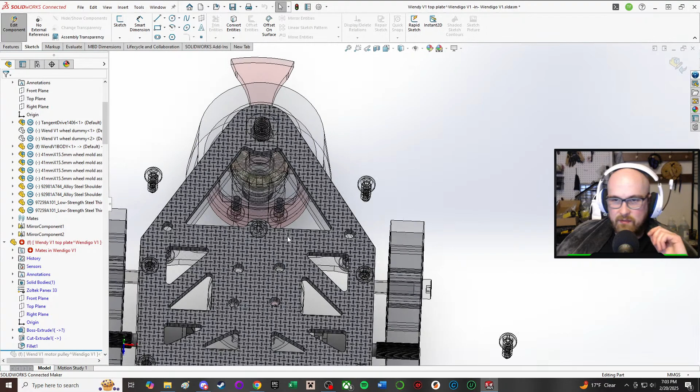But yeah, we're working. So since you didn't hear me, and for the VOD they're not going to hear me, I'll have to cut out the first part. But I was talking about how I want to make this part and this part one part, because these are already going to be 3D printed TPU, and since they're not one part, this ends up being a little more disjointed than I want it to be.

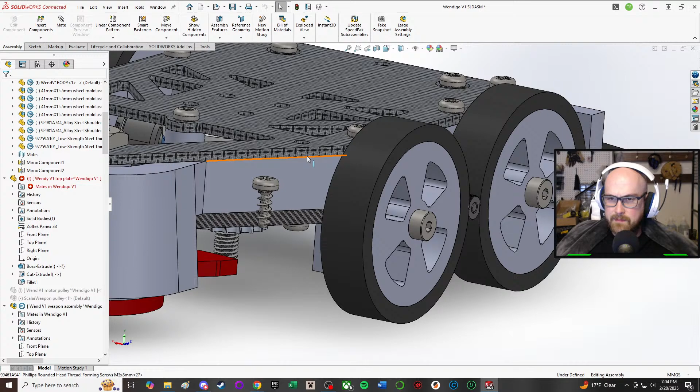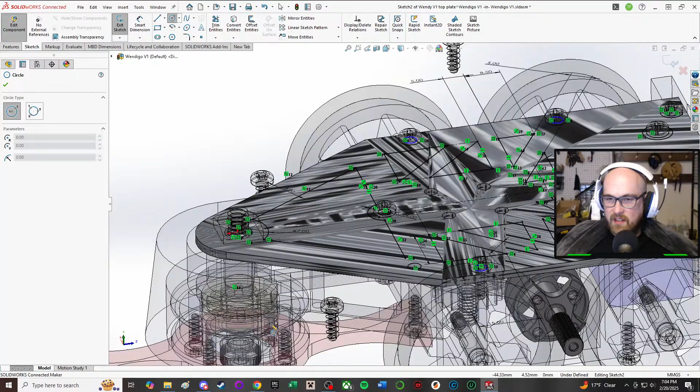Okay. So what's funny is I got rid of the whole thing, like I kind of knew. Hmm.

Don't want to sneeze into the microphone. Oh, okay. Couple weeks.

Are you, do you have your own robot? Are you also into the sport? Because I know I've gotten a couple people that haven't created a robot yet, sometimes in my chat.

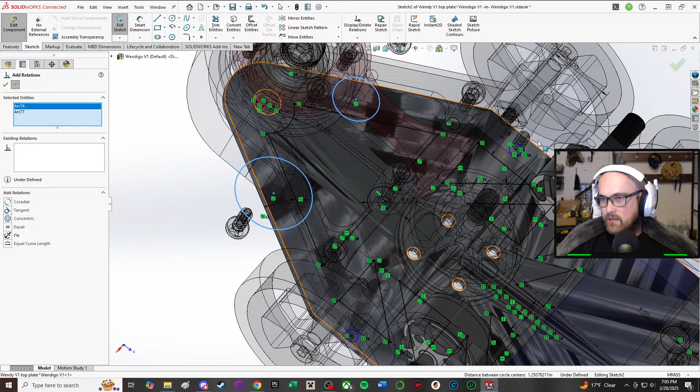Oh, for some reason it was making me select every cut region. It's weird because it normally doesn't make me do that.

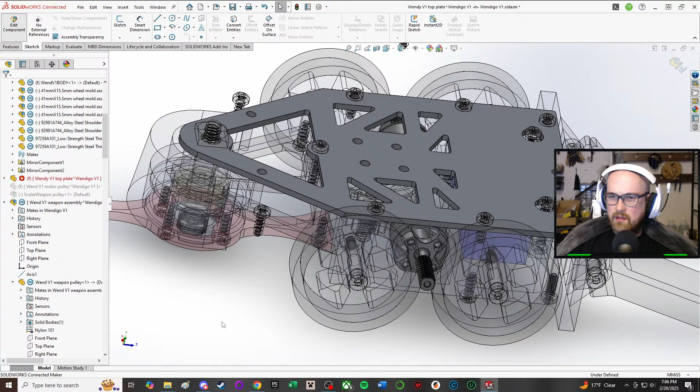I think I might start out, I think this for Wendigo, I think the first event I'm gonna run it as a plastic ant, just because I keep having second thoughts.

I keep having ideas like this for a robot, and then I end up thinking of other ideas. I'm like, oh, maybe I want to do that more, because I feel like right now I'm kind of looking for a robot that's going to be my main robot. All of last year, my main robot was Hodag, or not Hodag, Bigfoot.

And Bigfoot is what I think a little bit. I want something that actually has a weapon. Like I learned a lot with Bigfoot, but I want something other than a lifter, or at least has more going on than a lifter.

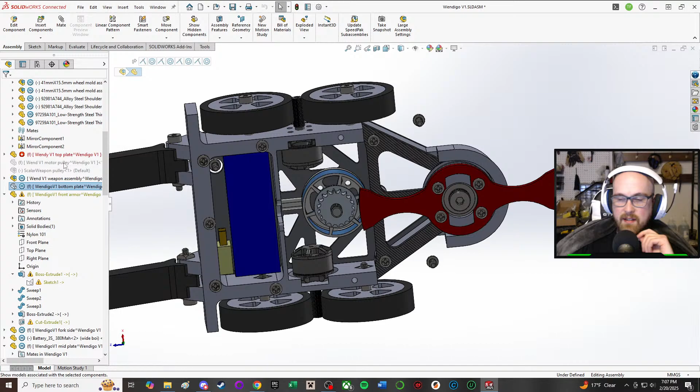Because I'd like to be able to deal some damage. Actually.

I'm adding a fillet here because there's not really much reason not to have a fillet there. There's nothing in the way.

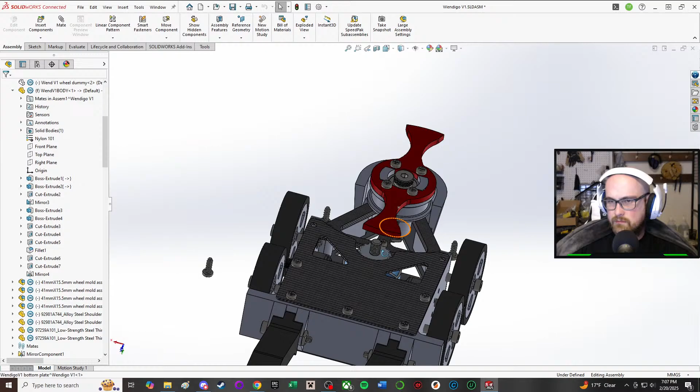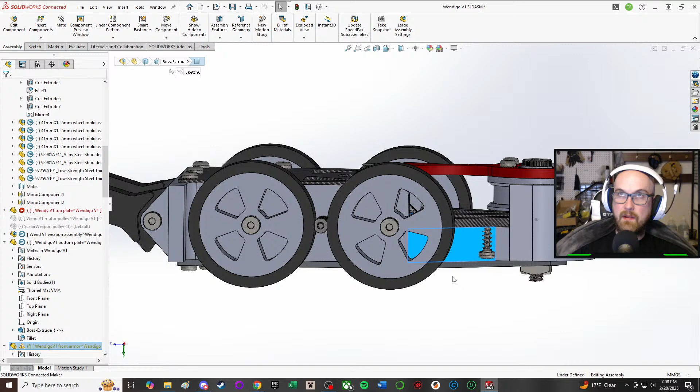Okay, I'm trying to think of the best way to add this part to this part, because I know that... you know what, I think I'm sorry. I'm thinking there's a couple of ways I could do it. It's not maybe a subassembly, because I've had to do this before. It's generally a very annoying process to combine two bodies. I had to do this with Bigfoot, and it was a nightmare.

Nope, I'm just trying to remember how to even insert a body, because occasionally I've done this. There's so many things I've done in SolidWorks, but I often forget about them. Actually, I know what I want to do.

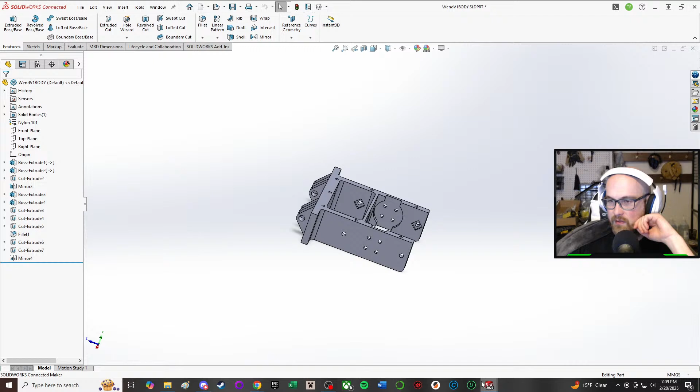Oh, I think the problem is... oh, I don't want to go to the STLs. Because I think the problem is I saved it. I didn't save it as a separate part, so it can't pull it.

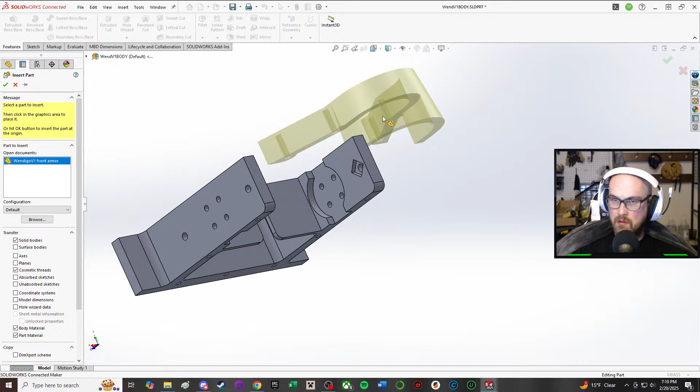Which usually isn't an issue, except for when I want to do stuff like this, or more specifically, if I want to use it. The thing is, I'm trying to remember how to actually move this around. Convert to mesh body, edit features.

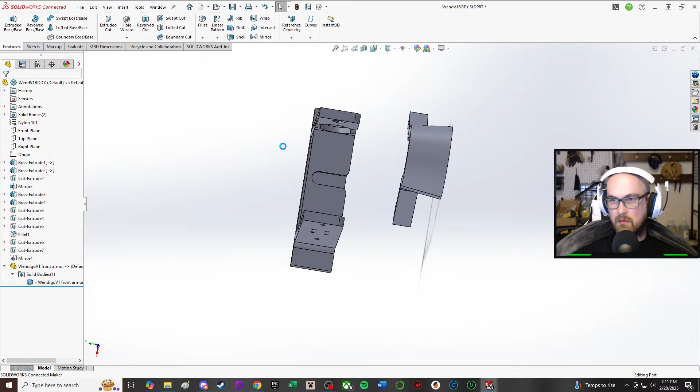This is the problem I had last time, it just sort of doesn't... it doesn't give you a good way to... fine. Almost the right spot.

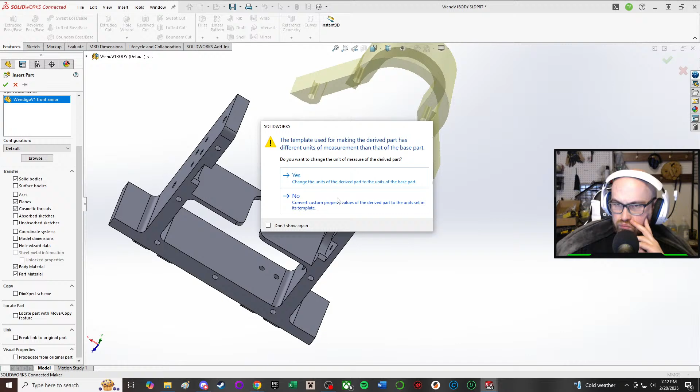As planes. Flip normal. I'm gonna have to do some Googling real quick, sorry.

Multiple configuration. Transfer. Just a 3D sketch on a plane. Current. This feels silly.

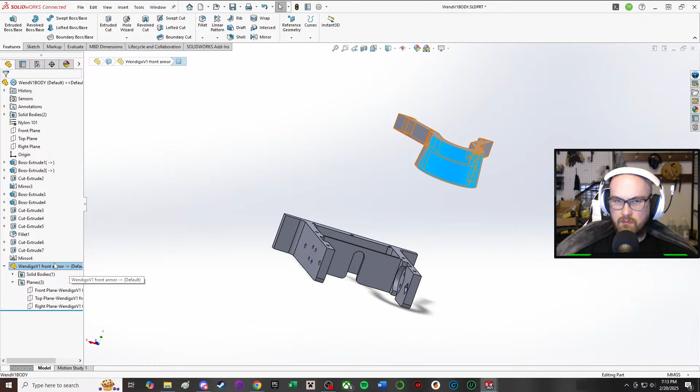Say locate part with Move/Copy feature. Okay, so I needed to check that one setting. It's kind of weird that that isn't by default.

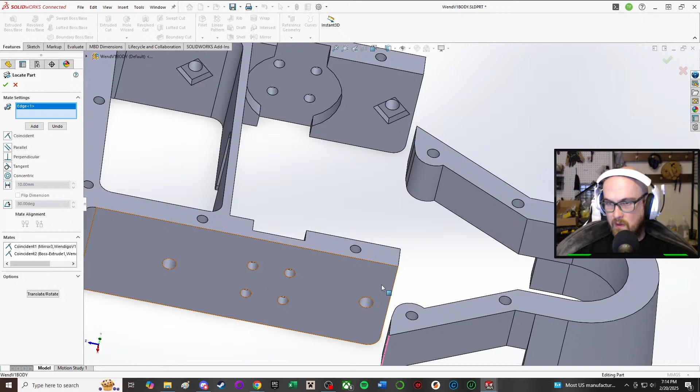Okay. Oh, there we go. Wait.

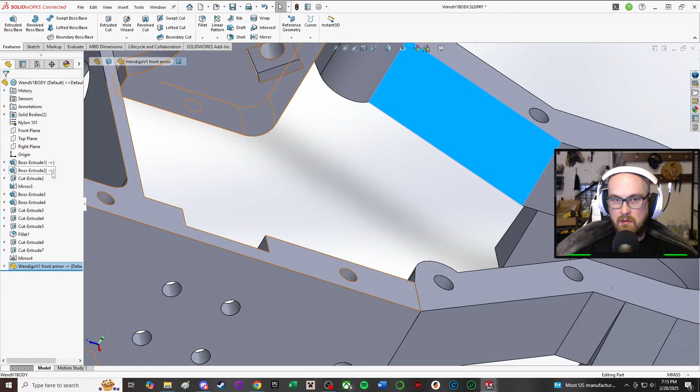Are these merged bodies or are they separate bodies? It's hard to tell actually. I didn't actually check if there was a merged bodies. Hopefully, if I try to, this should also conveniently still be pretty.

This won't make it any less 3D printable because it was meant to be 3D printed at the same orientation. So.

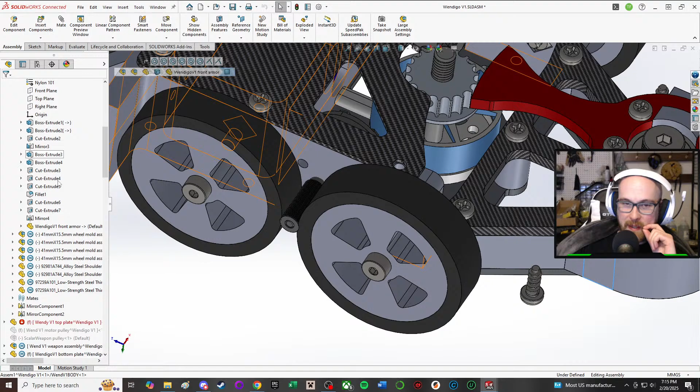Oh, just the body. Fortunately, now there's gonna be two of them, but I need to hide the other part if I can find it.

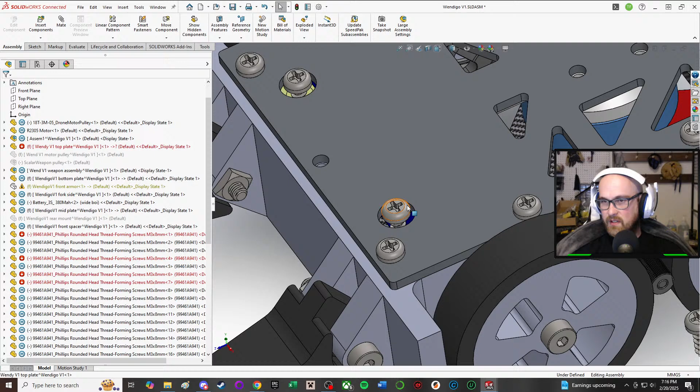Hide it. Okay, I think that was one big thing I want to do, and then these screws will mount there instead, so it should be a little bit more durable. Or not durable, not durable. It's a fine word. Also, I don't know what's going on with these screws. There's some screws doing their own thing.

That shouldn't actually directly affect the weight, really. Other than, I think I'm actually using the same number of screws. I'm just moving where the screw is. That'd be over here.

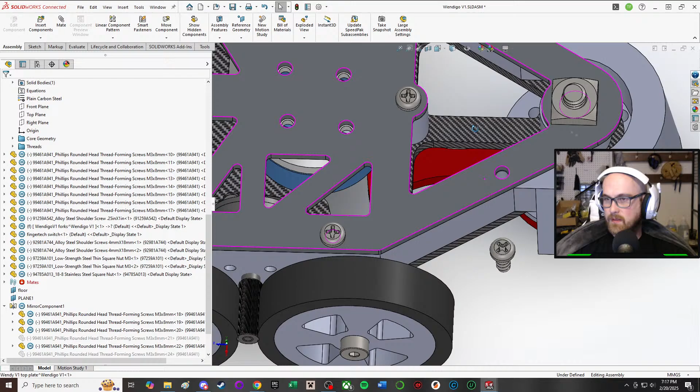But yeah, this is gonna be a real tight fit as far as weight goes. This feels like a lot of carbon fiber. Although, like I mentioned, I am going to start this as a plastic ant, so we'll see. Honestly, if I'm having struggle making weight as a plastic ant, then I'm probably going to have to make a lot of changes to make it work as a normal ant.

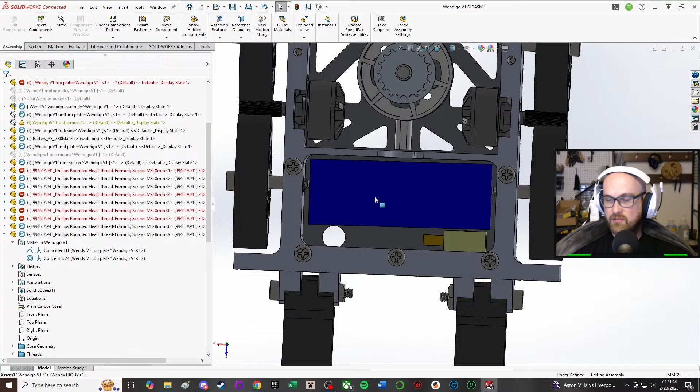I'm debating if I need more room for electronics because this is a really tight fit. Oh, I'm sure it's fine. This just needs room for, well, this is the battery, but it just needs room for the receiver and the two ESCs, the drive ESC and the... I a lot of times am lazy and don't put the electronics into the CAD.

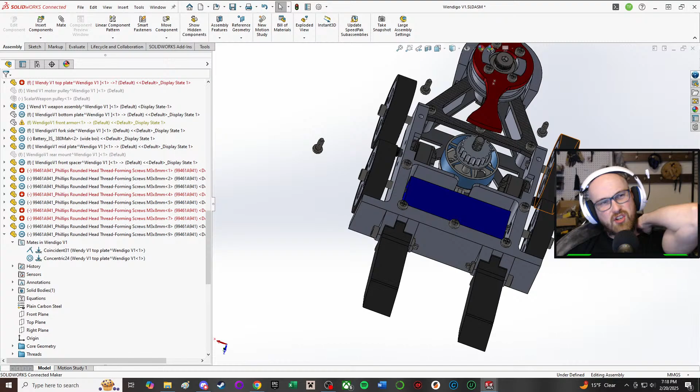Honestly this battery will probably be on the bottom closest to us, because we're looking at the bottom of the robot, because I intend on everything going in through the bottom. I just felt like that would be the easiest way to make this robot, to work on it upside down and flip it over. Hit the switch on the top of the robot for that very reason.

I actually don't have much more to do on the robot. Talking points.

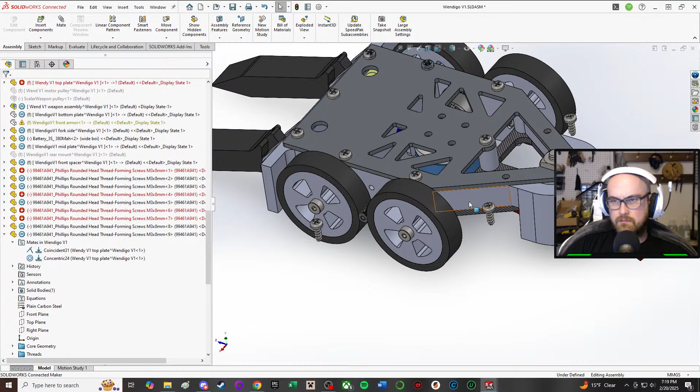Also, I feel like these tires look a little bit different than they'll end up looking, because there's no way to input the gyroid into the actual thing. Now I'm actually mostly just, yeah, I don't know if this robot's even gonna work, but...

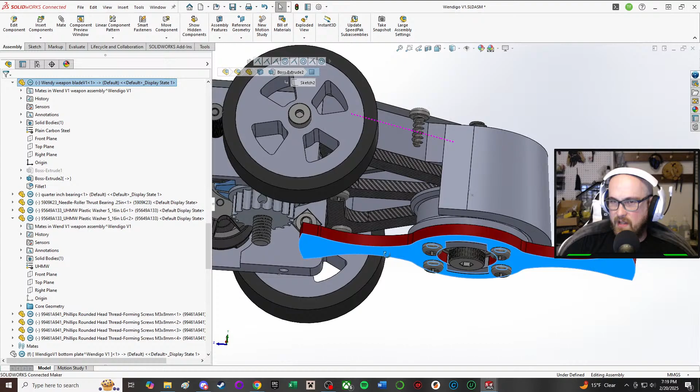It's kind of an ugly looking weapon, but I'm fine with it. I'm not trying to win any awards. Well, not any, at least for aesthetics, but...

Trying to see if there's any glaring errors. I think it's overweight because this is doubled up, and I think it's as if it was like pure nylon or some shit. This is gonna be rough to get underweight, but...

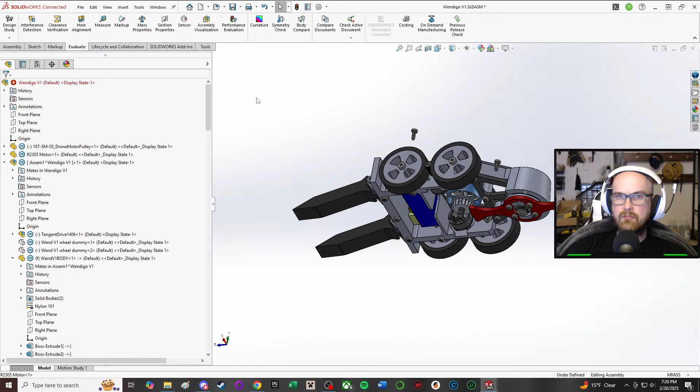Unfortunately, I actually didn't have much planned. This actually was a lot quicker and a lot less things to do than I thought. Although, I don't think I have anything else to change though. Although, do I...

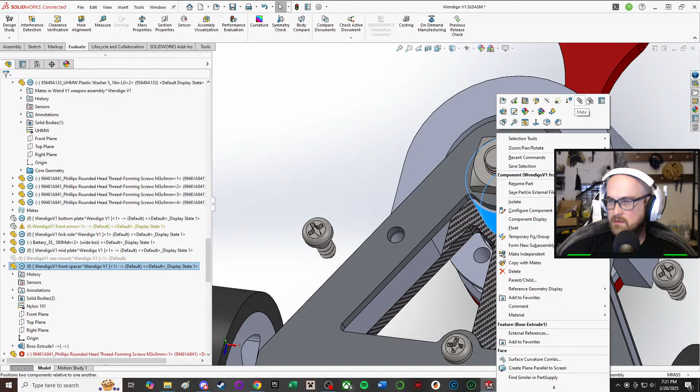Because what is this spacer on paper made out of? Nylon. Okay. Yeah, I think I'll decide later what I want to do with that. Maybe at some point in time I'll redesign the wheels too.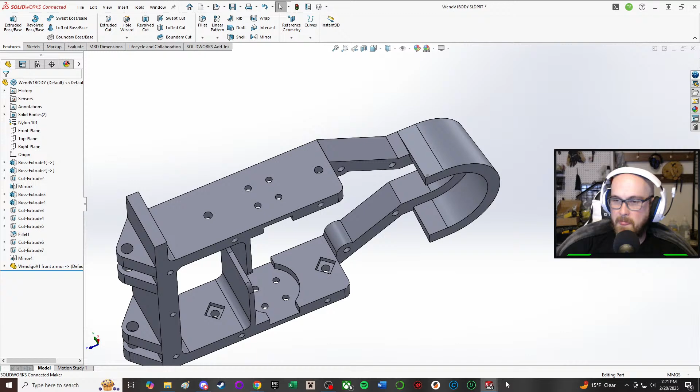This sticks out a lot. Also, wait a minute. Do I not have a hole for the shaft? I'm dumb. I never made a hole for the shaft of the motor.

I should probably do that. I'm gonna do that now. I realize, it doesn't look right. The motor, that would have been real awkward after I printed it.

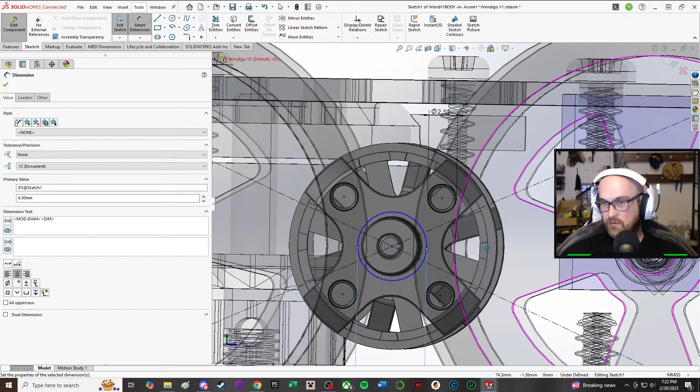I didn't even do anything, and it's yelling at me. I would have felt so dumb, casually not adding a hole for the shaft. Not.

Okay, that looks a lot better. Now I'm thinking about it, I think low-key I want to make it so the motors go in more, because this extends a lot.

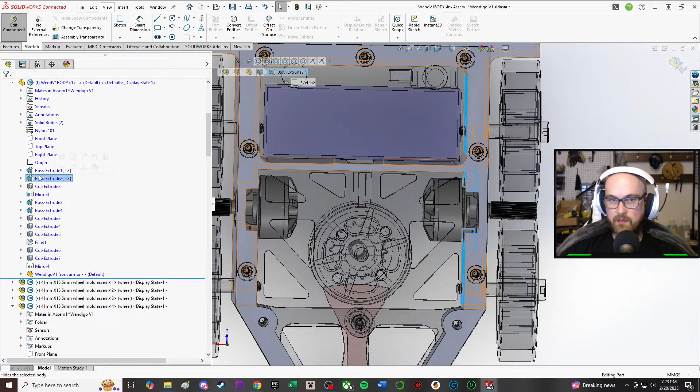So what I'm gonna do, I don't want to change the sketch, but I want the sidewalls to be the same, so what I'm going to do is edit both features. I'm going to add 5 millimeter there. Make this smaller.

Because the idea is that essentially these motors...

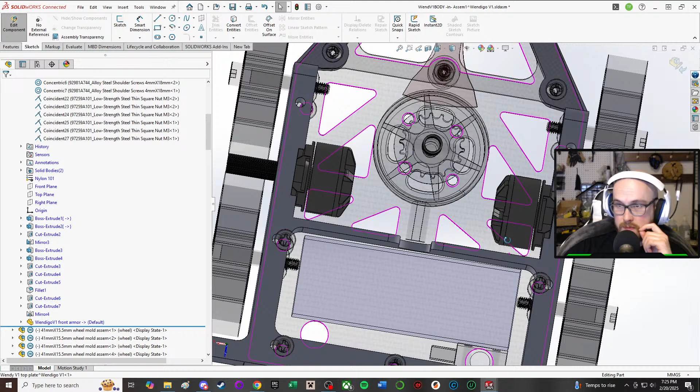This thing's moving in a weird way. It's not right.

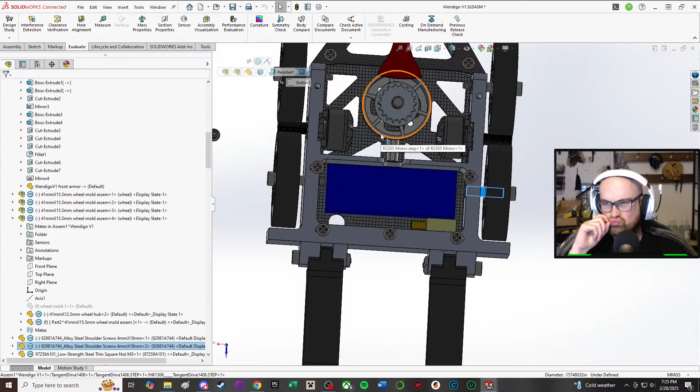Yeah, this is gonna be a whole ordeal, I think.

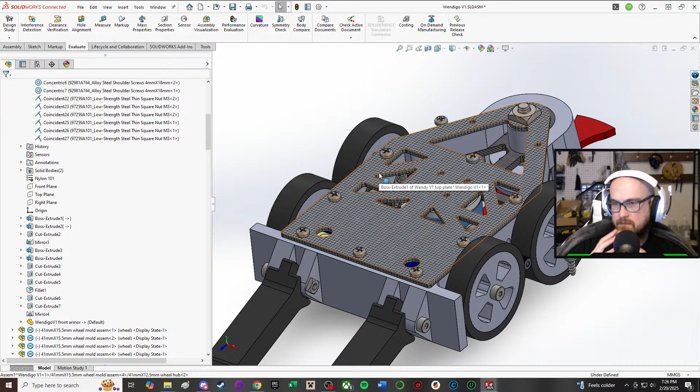Yeah, I think that might be all she wrote. I don't have too much more to go. I think we have the right amount, actually I think we have more screws than we need. No, we got enough, maybe. Yeah, we got close enough.

Actually, I think what we want to do.

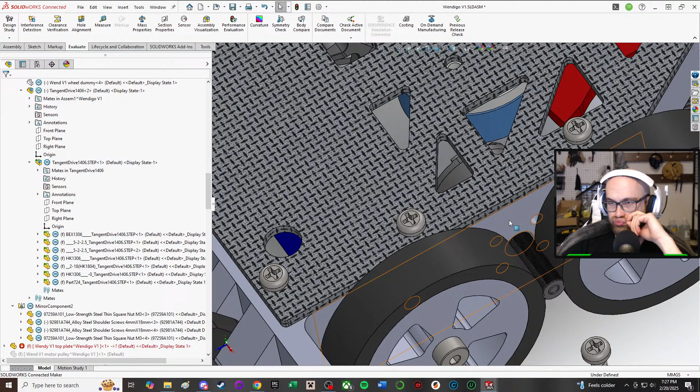Really, I feel like I just updated my drivers this week. Or I think it was last weekend, because I was having troubles with DaVinci Resolve and I went through pretty much all the steps of grief.

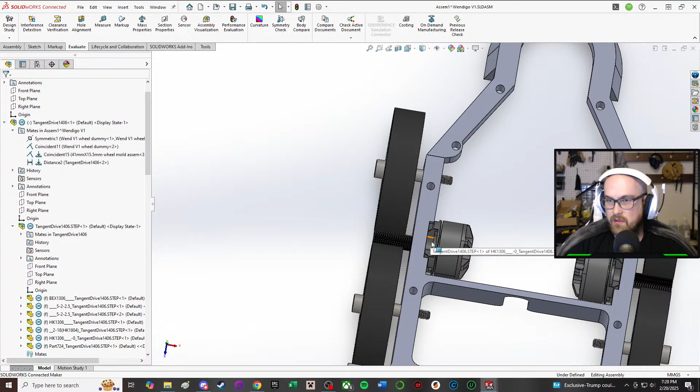Okay, so I wasn't crazy. Did I eliminate? No, it should be 4 millimeters and 2 more millimeters. 96, because I did 2 from each side, so it should be 96 millimeters.

This will put it. This will undo that weird stuff that I just created by adjusting the thickness of stuff.

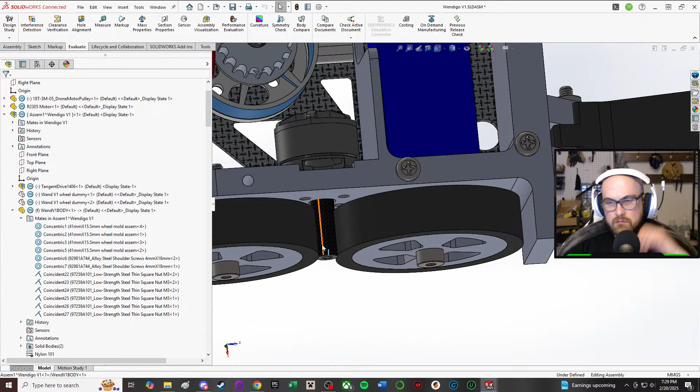Although I think I want to also have some screws. Yeah, I think we want room for the head of the screws too. Make them all equal. Definitely not 10. Just 2 millimeters to make room for the heads of the screws.

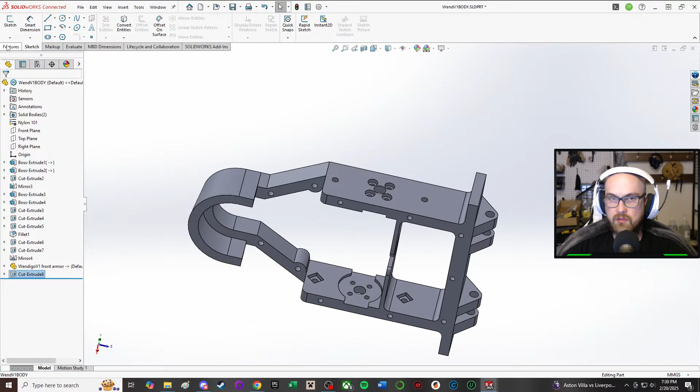Yeah, this is definitely going to be, there's going to be some trial and error involved with this. Robot. Also my first crack at tangential drive.

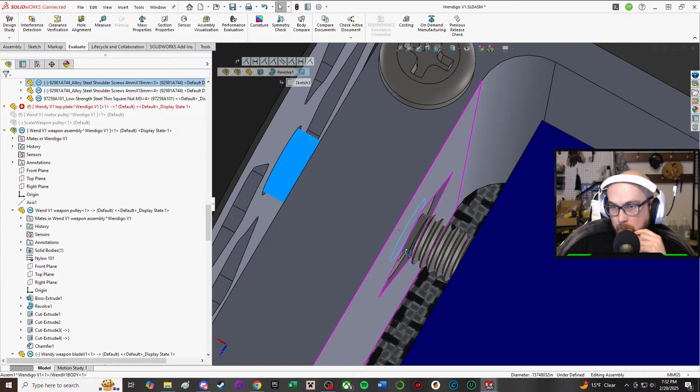Why do these feel long? These feel like they're one size longer than they should be.

What if I replaced them with 16 millimeter? Oh, they should be replaced with 16 millimeter. What am I doing? I should probably replace them with the 16 millimeter in the CAD. Because I was looking at what I was going to order, and I was going to order literally the 16 millimeter. Dang past me for being lazy and making it more difficult on current me.

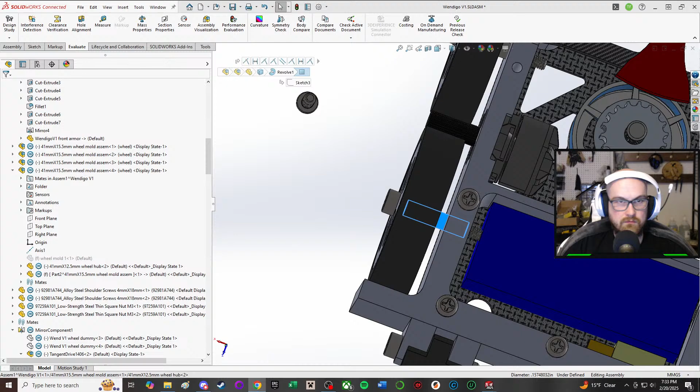Am I tripping? No, I gotta do it on the other side, that's fine. On the wrong side of the robot.

I use entirely too many shoulder bolts and things, apparently.

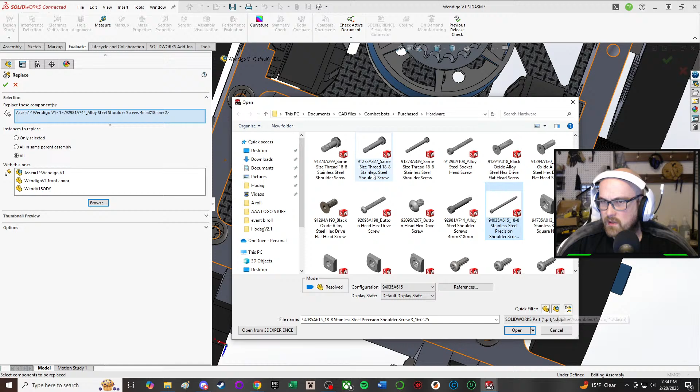Can I not just download it? A minute. Okay, so it's in there.

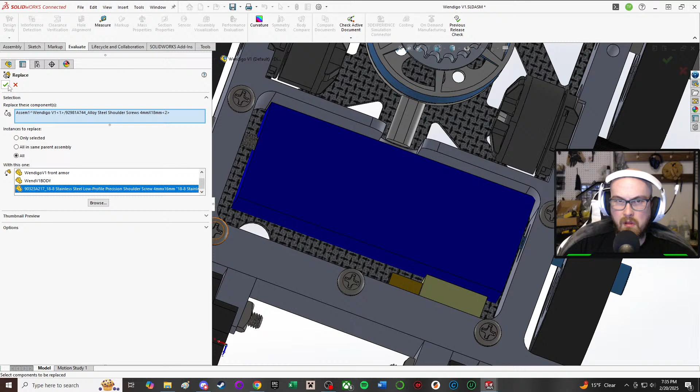Because trying to do it in the thing is a pain in the butt.

Now it's angry at me because it didn't like me destroying all of those things. Original one, right? Yeah. You're angry at me, I get it.

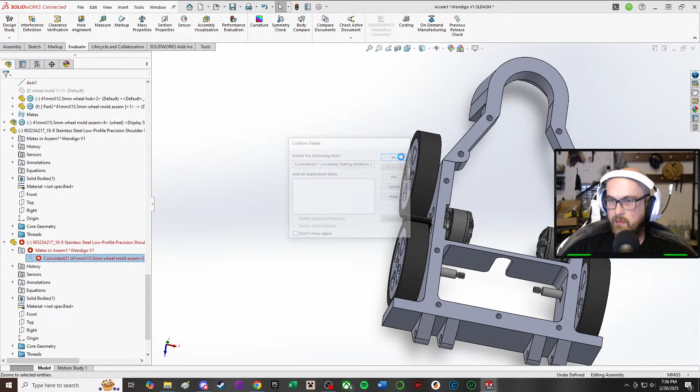Oh yeah, these are also the smaller head. Which is not an accident. Mostly because it makes it harder for them to just snipe them off. Plus, my weight is at a premium right now. Anything that makes this thing lighter. Also, I need to make sure these are steel, just to get a more accurate weight estimate. Even though I've kind of thrown away my weight estimate.

Yeah, you're angry about all my mates. Okay.

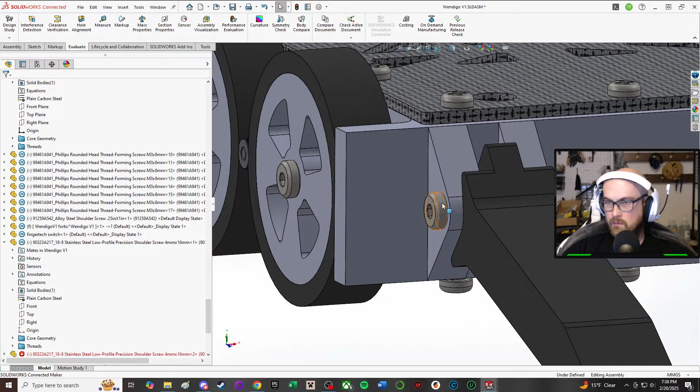Yeah, that should be good. Actually, I'm just gonna.

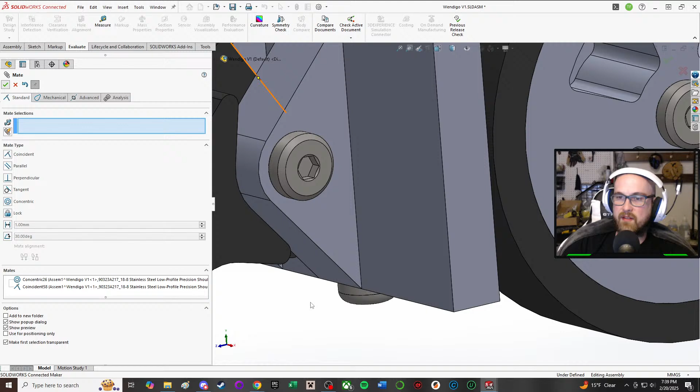I'm curious if this robot will actually end up being. I'll be honestly surprised if I can have it under weight as an open ant. I think where I'm at as a plastic ant will really tell me. Like, if I feel like, oh, I got plenty of weight to work with, then we'll be good. But if I'm like, oh, we do not have much weight to work with, then I might really throw away the whole idea.

But, right, I can really start printing this like now. But yeah, definitely after today, I'll be able to start printing and making this a thing.

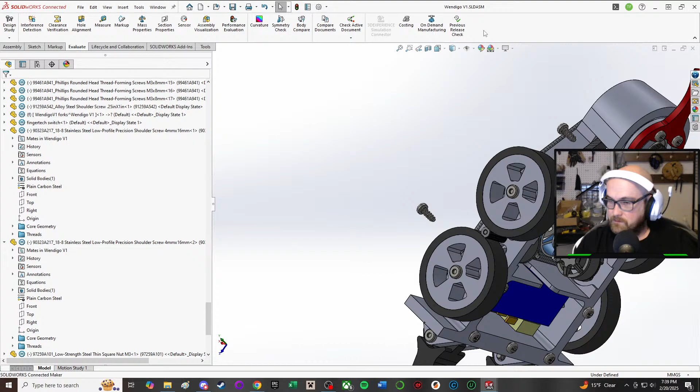Oh, hey Nova. She didn't feed you yet, and you're coming down here to see if I'll feed you? Sorry, one of the cats is down here. She's not one of the ones that'll come say hi to you guys, though. Also, I have to set up a cat cam. Wanna come up here? You wanna come up on? Nope. You wanna come up here? Say hi? Nope, she doesn't want to say hi. And I don't feel like moving the camera.

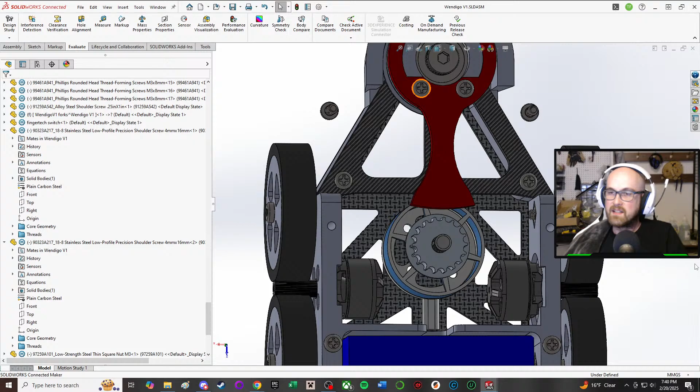I'm trying to see if I can find any glaring errors before I try to hit go on this.

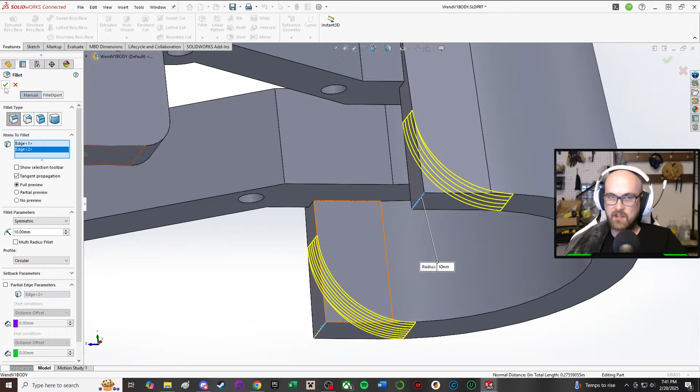I guess I could put a fillet there or something, because the problem is, if this catches, I just don't want it to be able to glance. I mean that feels huge, but it kind of feels right. It's going to glance in the way I want, because it'll glance downward, which, when you're hitting that part, you don't want it to glance upward. So all right, that's right.

Granted, it doesn't cover the pulley as much, but you win some and you lose some. Honestly, I don't think this is going to be a very effective robot in the first place.

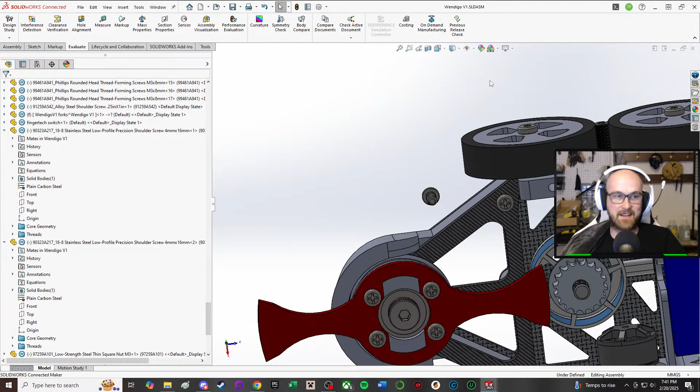I just came to a realization. I don't know what pulley I was going to use for this.

Oh, there's Daisy. Creeping.

I completely forgot what size pulley I was using for this, which is gonna be a problem. I don't know why I said it like that, but yeah, that's a situation I need to figure out.

Yeah, I need an S3M belt. S3M.

I feel like there was a belt I had in mind, but I have no clue which one. Now I got crap. Because I think I just sort of started with a vibe and then didn't do anything from there.

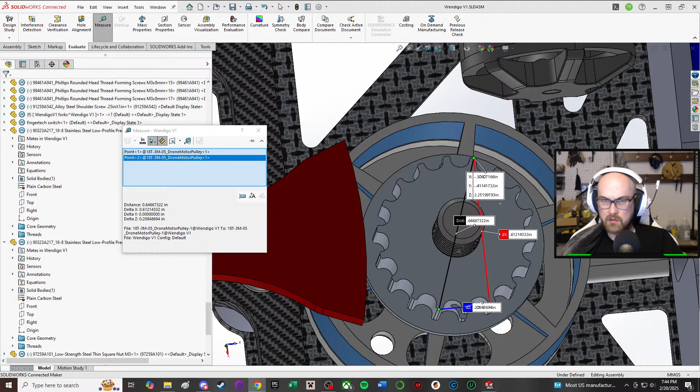Got point. Center distance.

What the... Just making shit up, SolidWorks? We're just apparently SolidWorks is just making stuff up. Like I click one place and it's like, yeah, no, that didn't act.

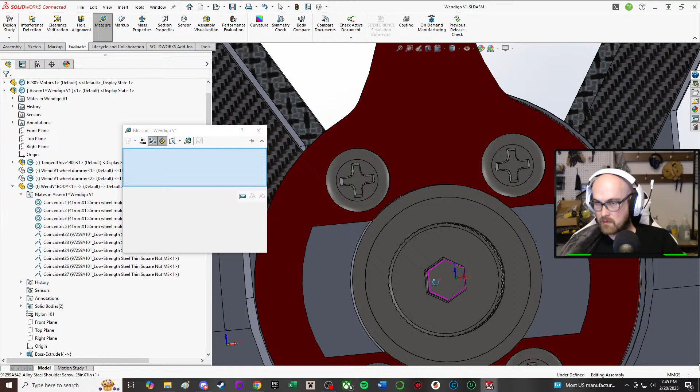I could probably do this in a sketch, and that's what a smart person would do. What I get for cutting corners.

We get just poor calculations.

Dang, that's a bigger pulley than I thought. Okay.

We need pulleys. Yeah, I'm realizing I overlooked - I think I did this over the course of too many days - just overlooked the fact that I need... around a pulley. Not pulley. Belts.

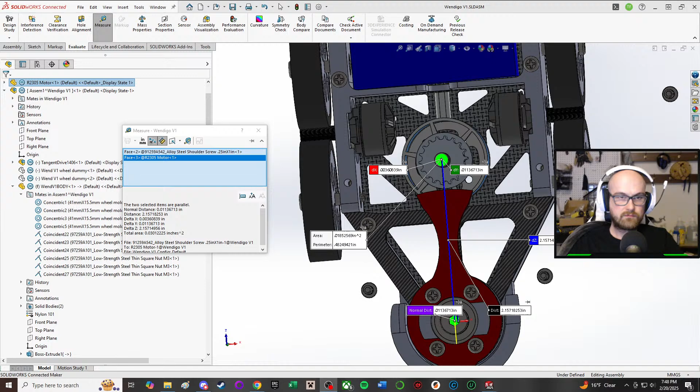Okay. Yeah, so this should work. But yeah, this should be good to go.

Oh yeah, next week I'm gonna have to start working on a new bot. Forgot about that.

Yeah, we'll see if we have to make changes. I may end up having to revisit this robot once I figure out all the crap, the whack crap that I end up messing up.

For now, next week there's a kit bot that I want to put together. I want to make a robot with the express purpose of being cheap and easy to build, and have it be a design that I give to the public, and make it. I'll make a video on how to make it and stuff.

Because apparently everybody that does anything in combat robotics eventually has to put out their own kit. But I think that'll be one that I'll share. Everything else I'll probably keep close to the chest more. But...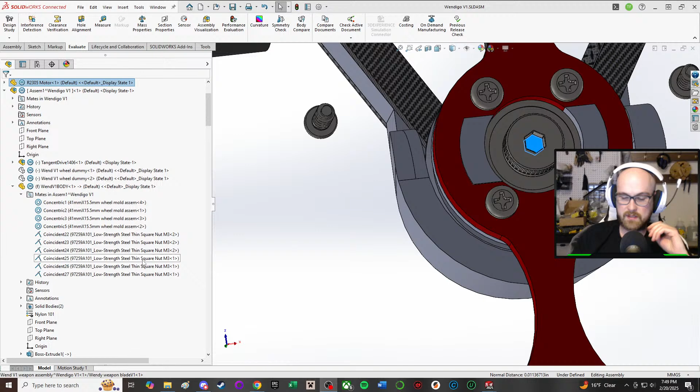Like this will have to be like the beginning of April is when this, so I'll have about a month to work on it. But that's also working on Hodag.

I'm gonna have to get Bigfoot ready. Hodag's undergoing some major changes, so that's gonna be a whole thing.

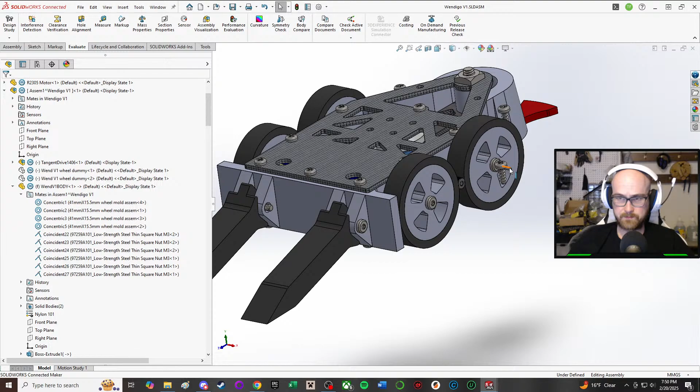But hopefully this robot, we'll see if this robot ends up being something I like and if it ends up even working. So I think I might cut it short this week.